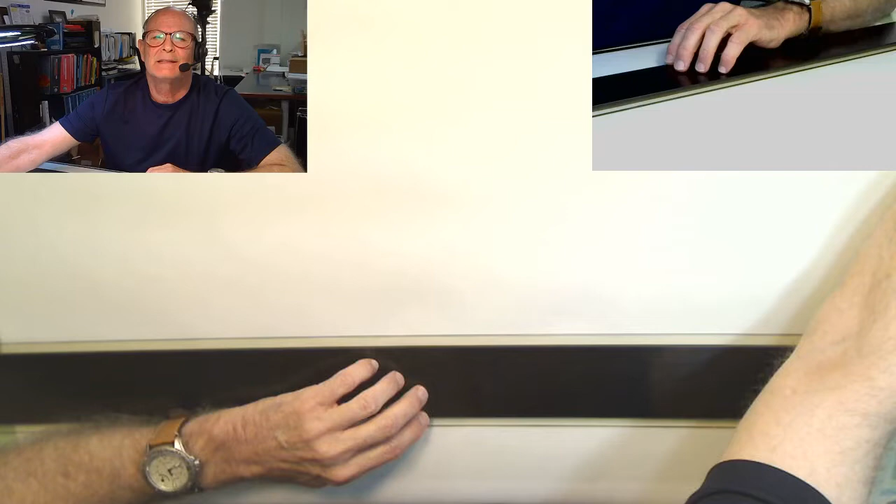Today we'll be working on reflected ceiling plans and interior elevations. So our first set of drawings in this video will include the reflected ceiling plans. So as we begin this, it would be a good idea to pull up some information that will be important for the assignment. I suggest that you print out the assignment and have it available for reference in case there's something you need clarification with or some assistance with.

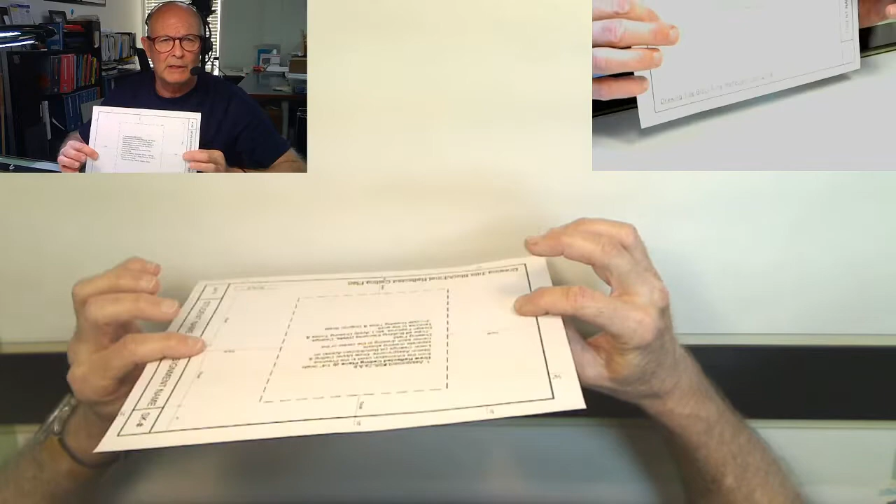Secondly, I would suggest having the assignment drawing format provided for you, so that you can look at that and understand how that works. And then lastly, it'd be good to print out a copy of the example plan so that you can refer to that as the drawing is being put together.

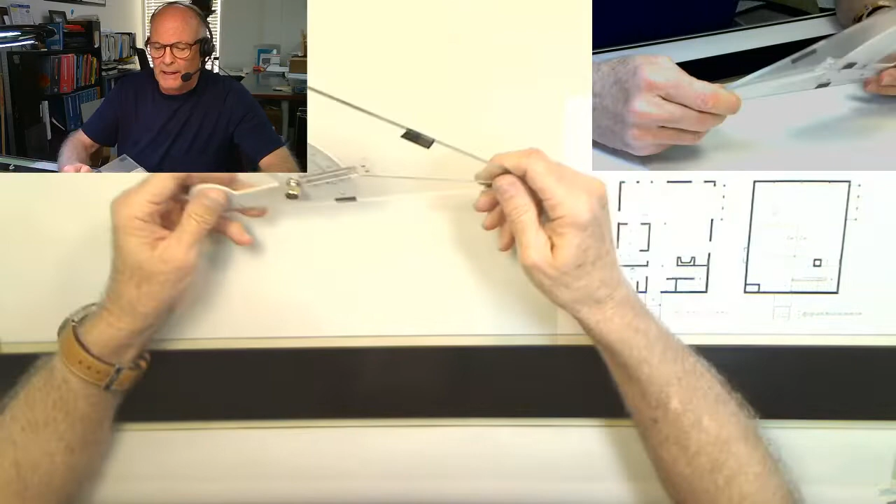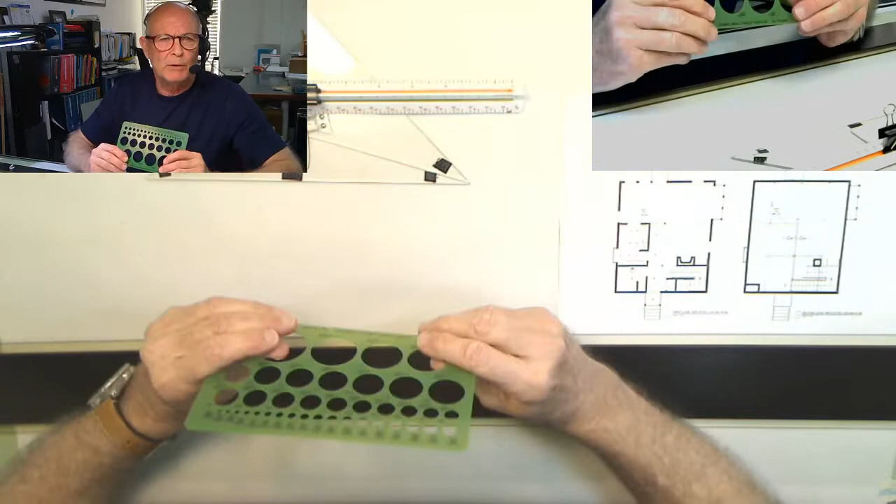So as we do this, there's a couple tools that will probably be helpful for you. I would suggest that you get a triangle that works, a 45 triangle or 30-60 is fine. A scale that includes a 1/4 inch and 1/8 inch architectural scale. Then a template, a circle template that has a variety of circles. The ones that are going to be important are ones that are listed to have an 1/8 inch diameter circle in them. So that'll be helpful later on. Some tape for holding the drawings in place, and then eraser and pencil for the assignment.

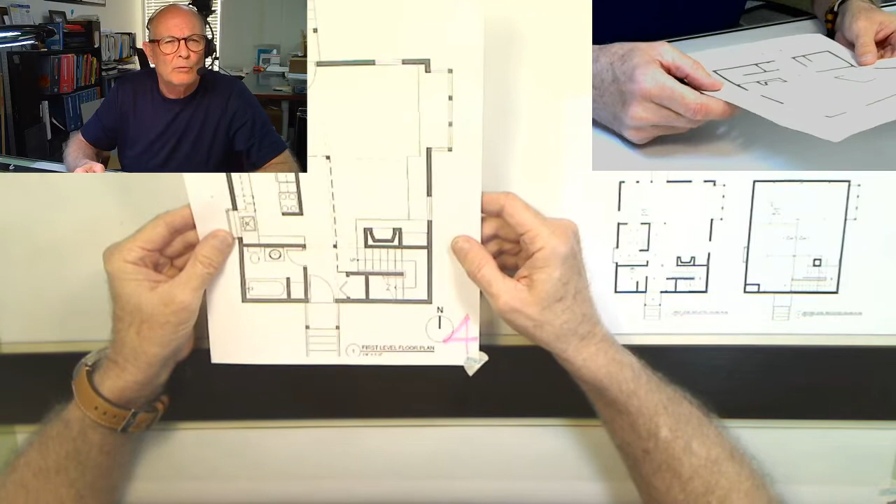So another important element in what we'll need tonight is the floor plan. So as we're working on the floor plan, it's a good idea to grab the drawing that you did previously of the lower floor. That's what we'll be taping down first, and get it set on the drawing so that we can refer to it and use the information there in the development of this next drawing.

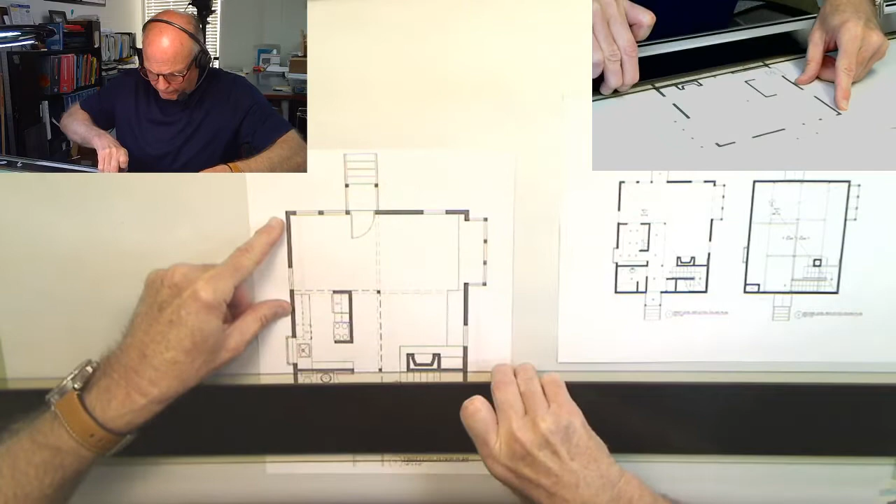So as you tape down your drawings, please make sure that your drawing is square and is oriented correctly the same way as it is on your floor plan. So all the labeling should be the same as what's going to occur in this drawing. So go ahead and square it up so that the drawing will go quickly.

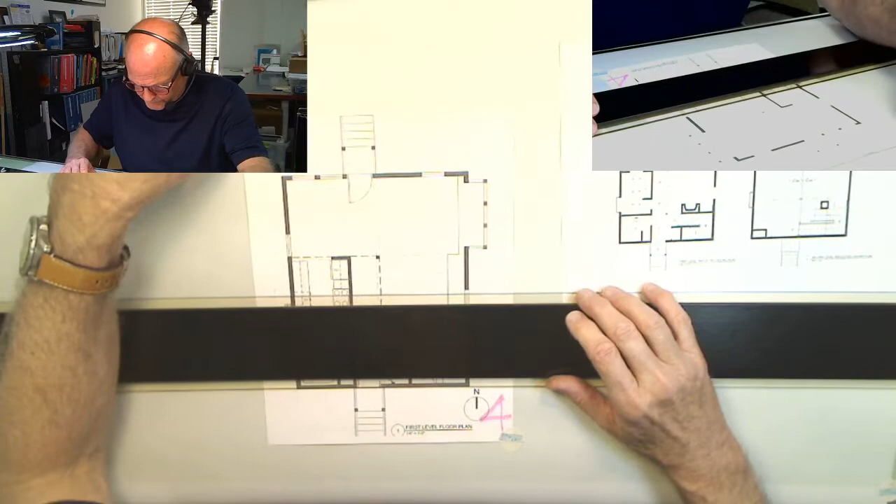Okay, so now we have the plan taped down. Let's go ahead and place a new vellum pretty much right on top of the previous drawing, making sure again that it is square and true to the parallel and T-square.

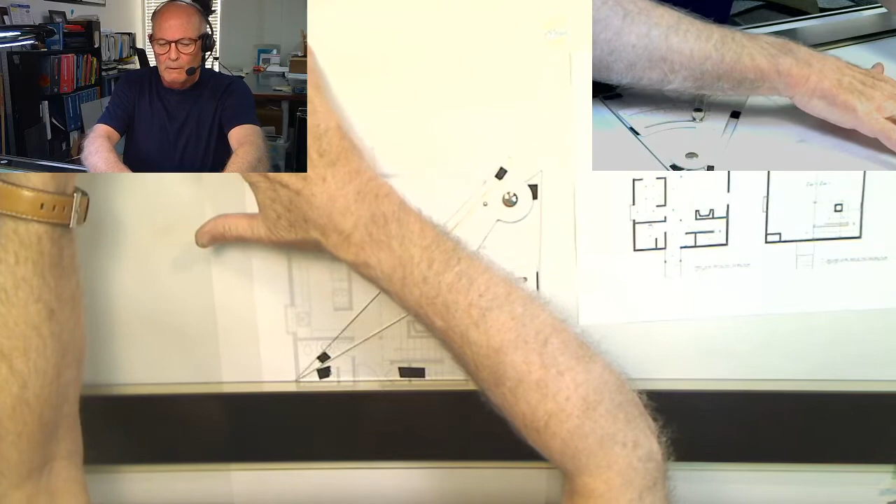Okay, now once we have it set in place and squared up, then what we'll want to do in the very first step is to simply trace the plan, and that would be the outside walls and the inside walls. And later on we'll add in the features of the plan that are important to have on this drawing. So go ahead and just trace the outside walls and the inside walls as they appear on your floor plan drawing.

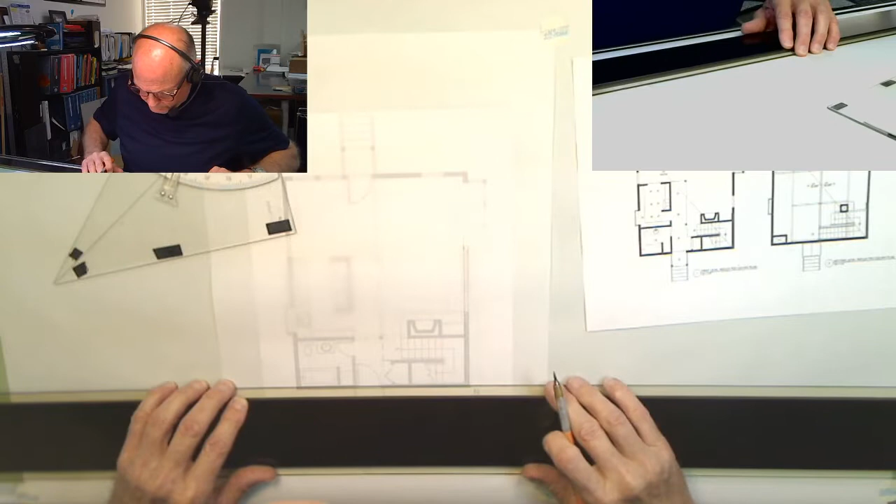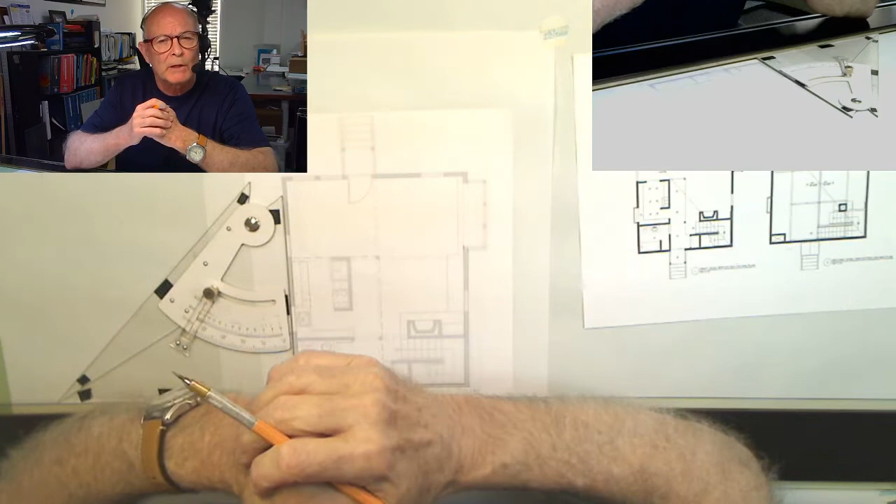Now, one of the things that you'll observe is that as I'm drawing, I will be drawing lines right over the doors and windows. And this is because as we look at the reflected ceiling plan, our plane of horizontal cut to create the plan occurs much higher in the picture plane. And what that means is that our perspective now is actually above the door opening and above the window opening. So what we'll be seeing is actually the head wall condition that occurs above each door opening and window opening. So just continue your line straight across and we'll come back through and mark them so we know the approximate location of each door and window.

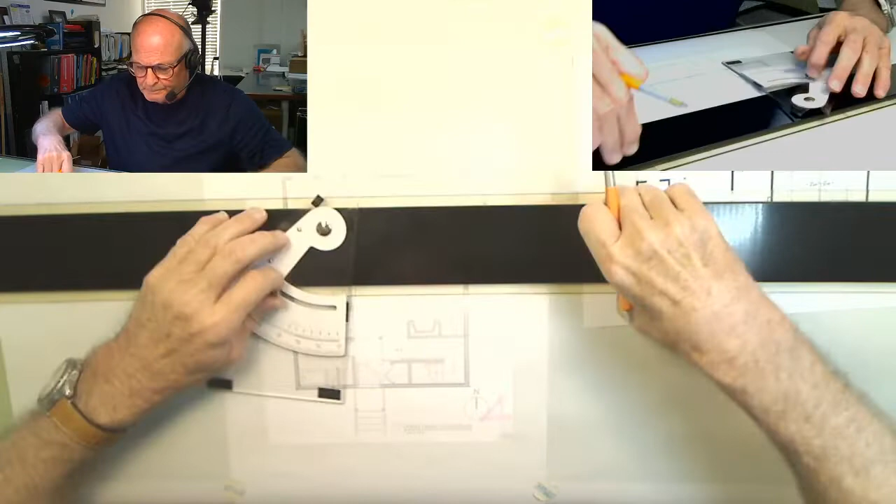Okay, so now that we have the outside walls, if you'll remember correctly, the interior walls are 4 inches, the exterior walls are 6 inches. So please try to use the same scale for all these drawings.

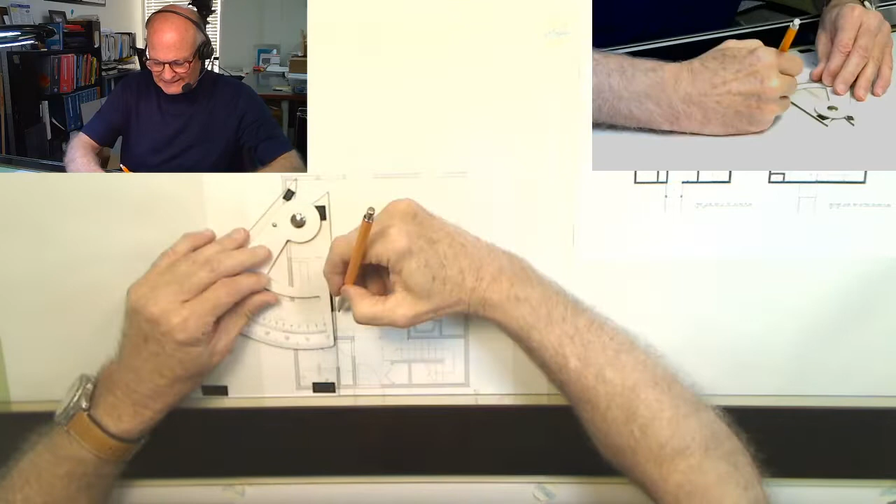Okay, so now that we have the outside walls and the doors and so on just basically drawn over those, and we have the interior walls, it's a good idea to pick up the solarium, the porch elements, and maybe the greenhouse window next.

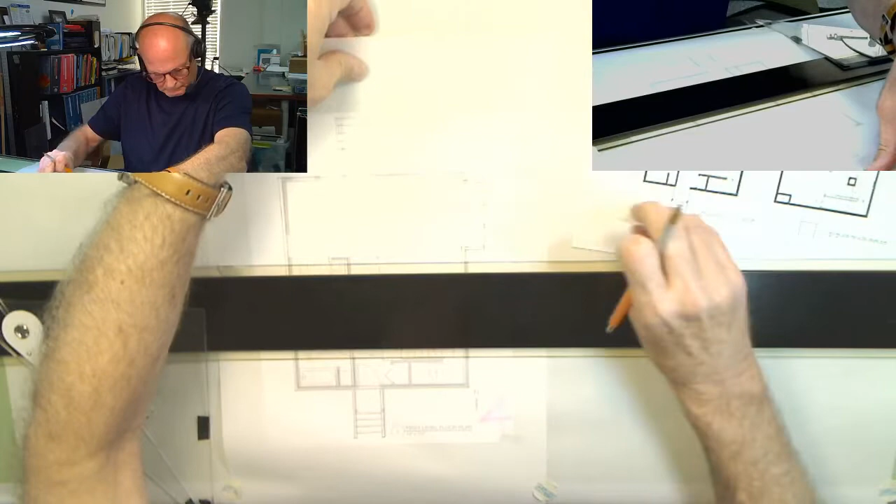Got a little tape debacle there, so we'll pick that up, get that back on. Okay.

All right, so now we have the porches, the solarium, and put in a little greenhouse window here. And so we can finish up the exterior of the building. All right, so what we have is the basic building form. There's a few things inside that are important that we need to also include in this.

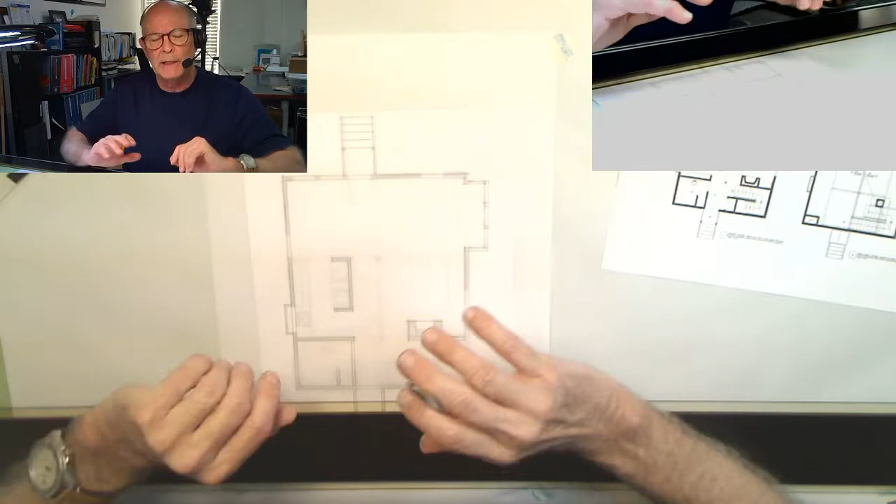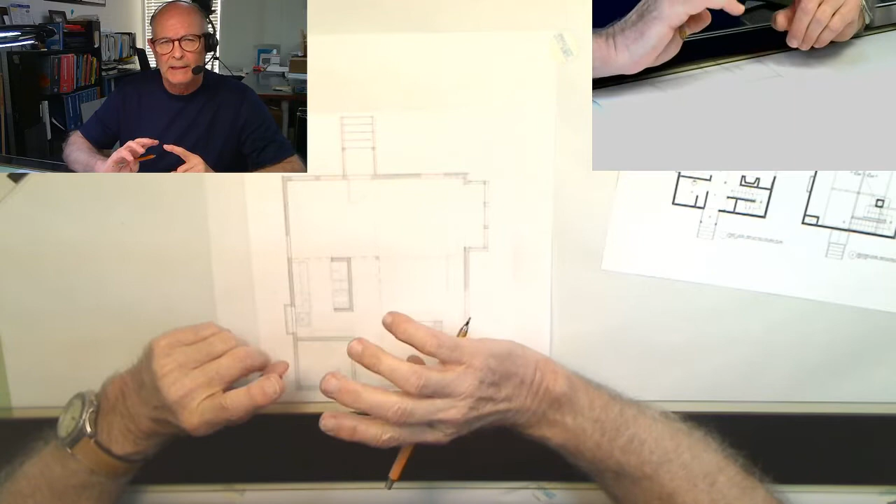And so what we want to do is pay attention to certain things that are happening and remembering that the space from the section drawing, you'll remember that some of it was open to above and some of it was all at a lower level. So that lower level, which is really the ground floor level, needs to be looked at differently for this reflected ceiling plan because that's what we're focusing our attention on.

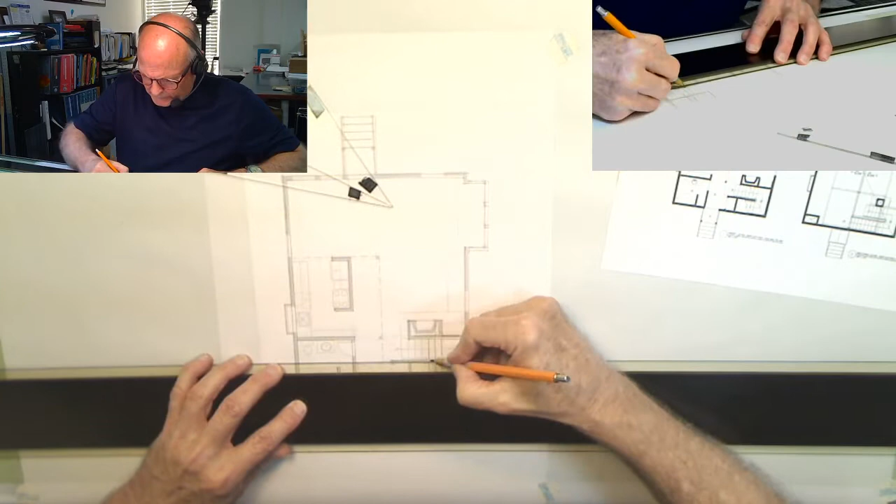So in completing this part of the drawing, let's take a look at the interior features and focus on them for a minute. So I would spend some time on the stair, on the bathroom, and the kitchen, filling in and outlining and tracing those forms that you have on the drawing already. Oh, forgot my closet here. Let's get that in there. Okay, and the stairs, we'll get those put in.

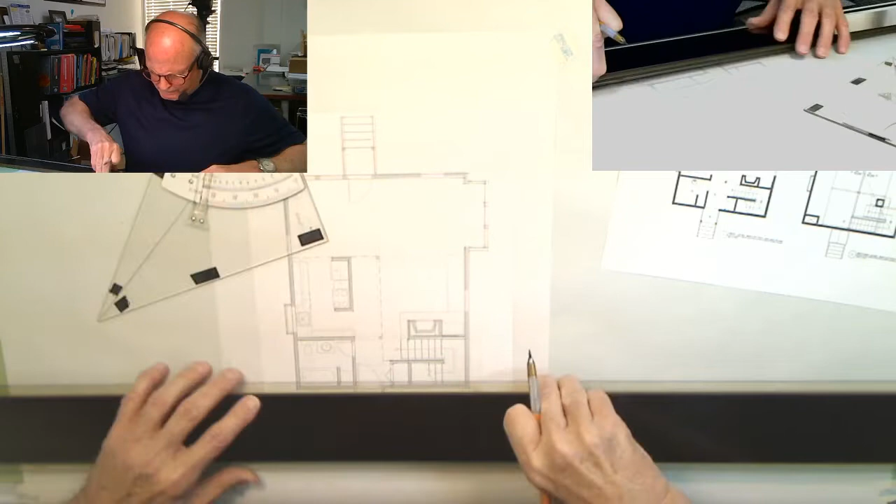Now the bathroom, we have a tub, a water closet, which you can just kind of rough into that form. You can use your templates or you can kind of come up with your own at this point. It's just a rough in, so that's probably something to keep in mind. We have a lav sink, and then we have a little cabinet. Okay, so the stairs are done. The washroom is done. Now we'll do the kitchen.

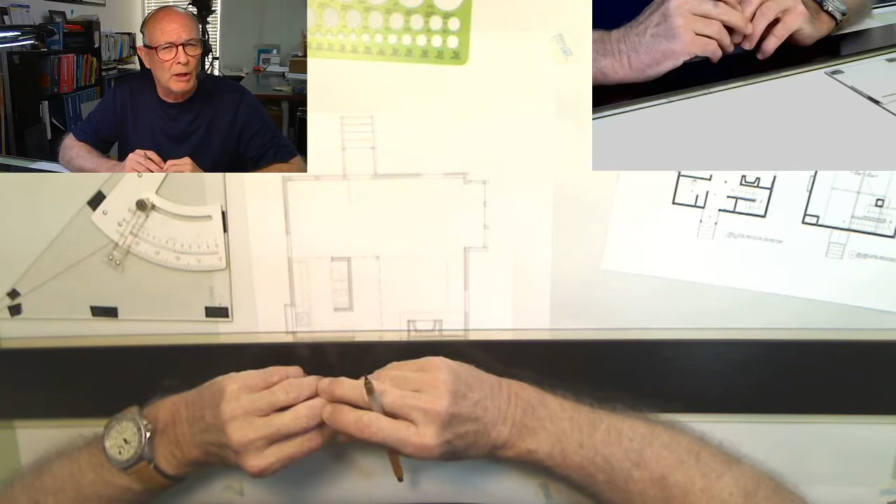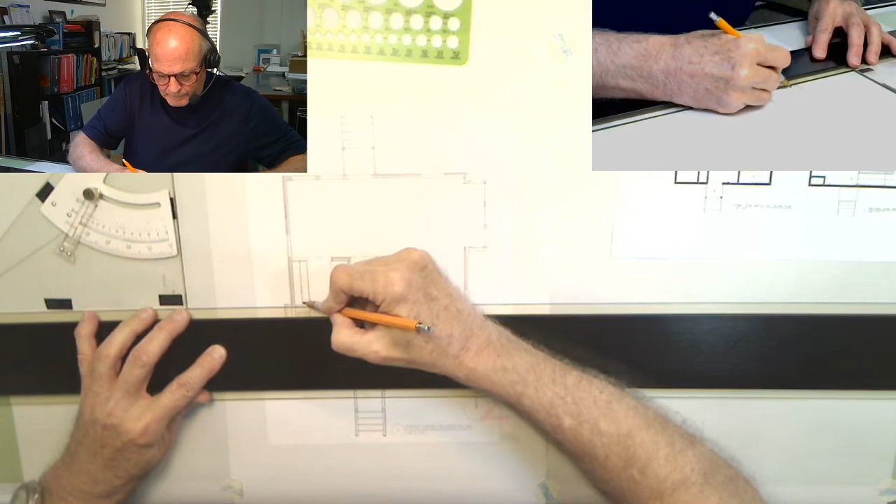So in the kitchen, we're going to put in the base cabinets. We're going to put in some plumbing fixtures, and we're going to put in appliances that will help us understand how the lighting is to be laid out. Now it's probably worth thinking about this a bit. Since our cut and our view is so much higher, we will not have dashed lines where the upper cabinets are anymore. These will all be solid lines because we'll be looking down on them from the ceiling height down.

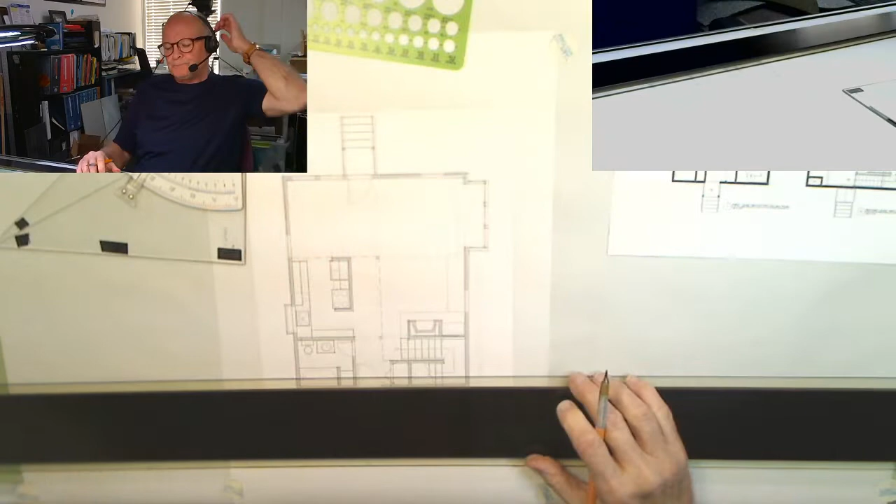Okay, so we're getting close. Now, as we look at this drawing, we're going to see that there's some important elements that haven't been thought through just yet, and it's important to think about them. And that is that the elements of the lower floor really only occur in terms of spaces at the kitchen area, at the hallway that leads to the entrance down here, and in the washroom. And of course, there's a little space here for the closet as well. But those are all at the one-story space.

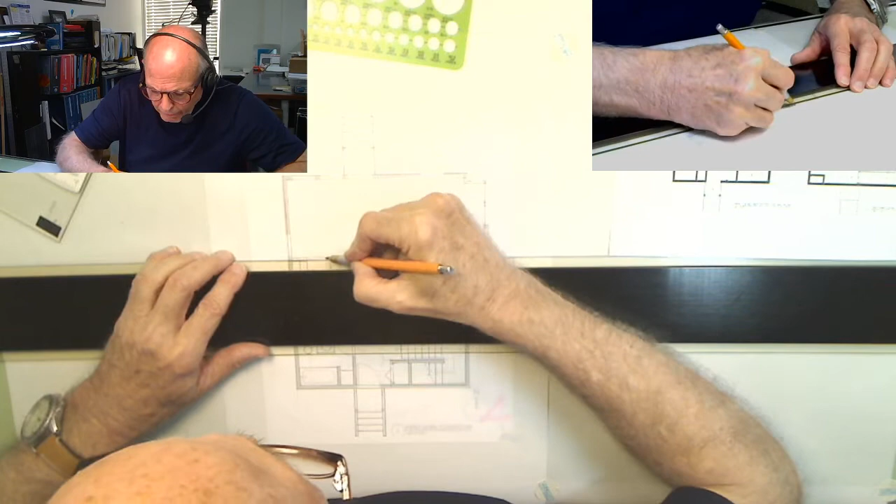The remaining portion of the plan extends up to a two-story space, and so it is open to above. So, as a result, it's important to define where those boundaries are, and that's done as an edge condition, much as you would see in a soffit or a ceiling overhang. So, I'm going to draw that in here as just a single line. And those lines line up with the posts that are supporting that second floor.

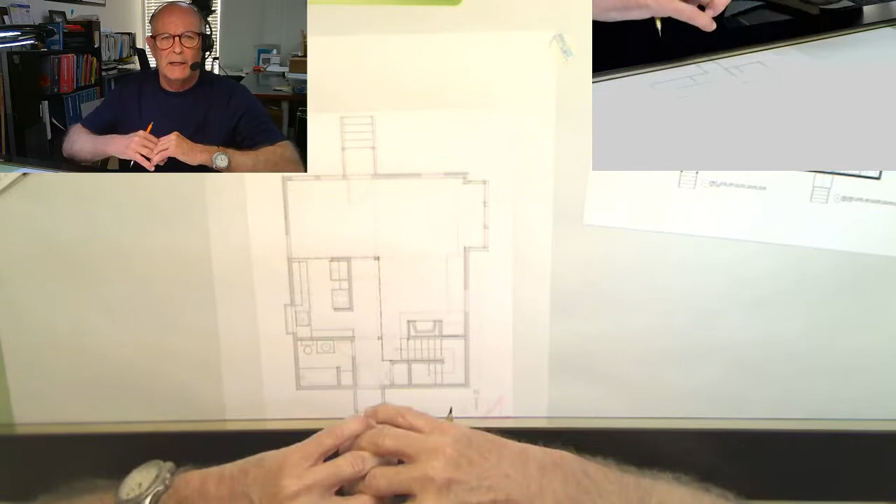Okay, so let's do a quick review of where we're at. We've drawn the outside, we've drawn the inside walls, we've applied the porch, the solarium, and the greenhouse window on the outside. That didn't take very long, and nor should it. This information is already in the design, and so what we're really doing is replicating it, so that we can look at how the ceiling is treated and what are the ceiling components that are going to go in it. Primarily the lighting, and so we'll be taking a look at the lighting in just a minute.

So we have an edge along here that is supported by the posts, and that represents the two-story space right here. So as we move from the second floor plan and start to transition to the ceiling plan, the things that we'll want to know are that there are things on the ceiling that need to be placed. And the primary element, at least in this exercise, will be the lighting. So let me say a couple things about lighting.

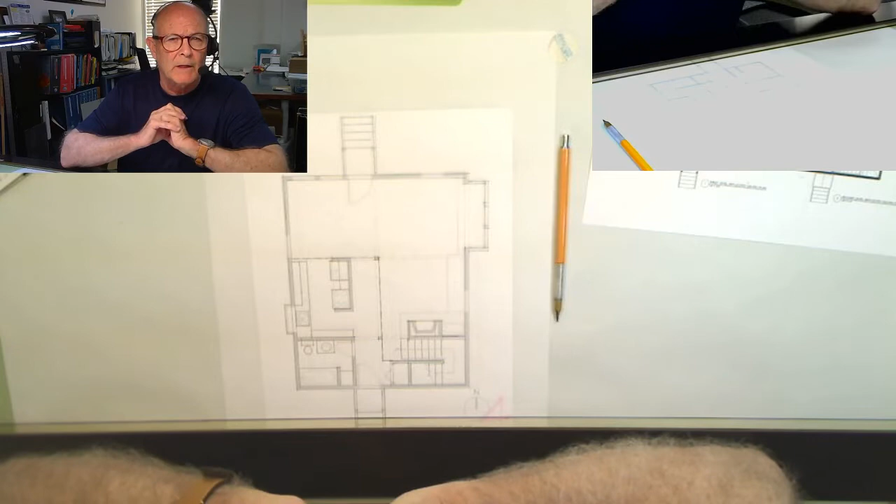We want, as a design, the lighting to be represented in a thoughtful and well placed kind of arrangement. And what that means is typically that we want things that are centered in the space or logically located in such a way as to create order and continuity in their placement as well as function. So in this plan, we're going to use our sheet that we have here, and we can see the lighting that's provided. Now, the lighting that's here is a 6-inch downlight for simplicity purposes.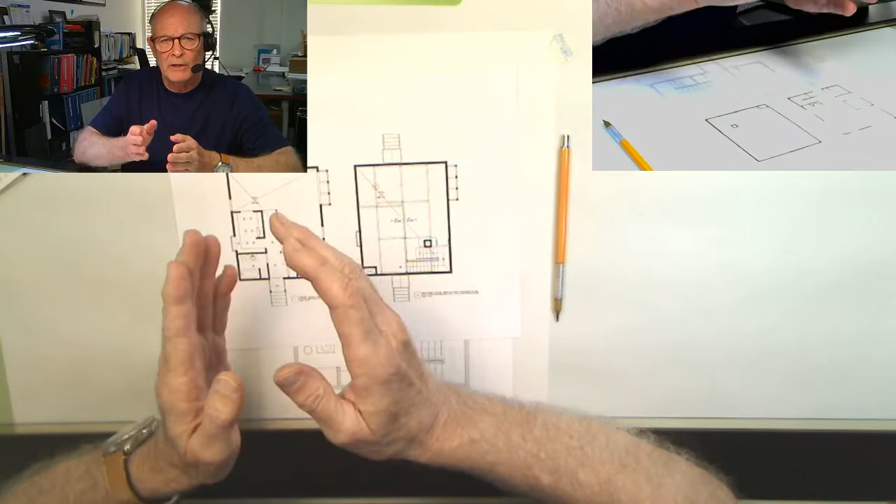And so what we're going to want to do is look at how they're placed so that we get the best benefit of, I'll say, spacing and symmetry on how they're located. So I'm going to walk through the placements on here, and then you can follow along and mark them on the plan as necessary. So first, let's start outside the building. We have lighting in the porch ceiling so that it lights the porch area and illuminates the steps as people are coming and going.

Additionally, we have similar lighting in the interior stair. At the lower level, we have lighting at the landing at the bottom of the stairs so people can see where the stair starts. We have lighting on the landing halfway up the stairs, and then on the second floor you'll see we'll have lighting above the landing there also. So those will need to be provided.

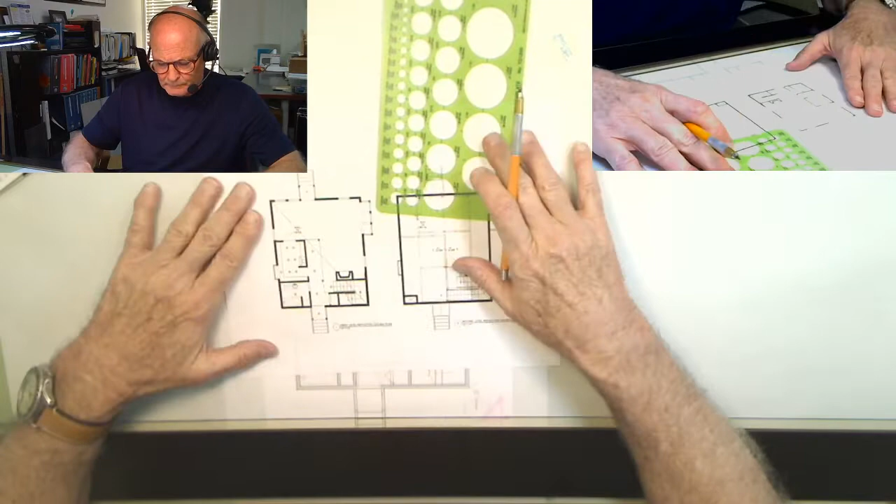Again, using a 6-inch downlight, which will be represented by an 1/8-inch circle on the plan. So those are pretty easy to place. Remember to look at the plan here and try to place them in the center. So they would be in the center of the landing, left to right, and also top to bottom. Likewise, down at the bottom, we want them centered in a way that we get good illumination of the lower landing area.

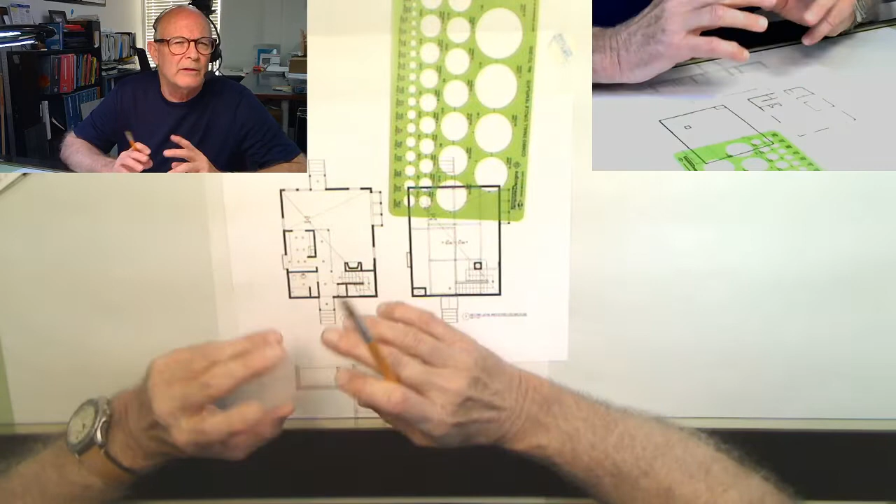The next space includes the washroom. The washroom has some very simple fixtures. There's many more fixtures that could go in these, but for this exercise, we're just keeping it simple. We have a central downlight provided for general illumination of the space. And then over the lav, we have a small lav light that is a wall mount fixture. If you look closely, I just try to replicate its shape and its form when placing that one as well.

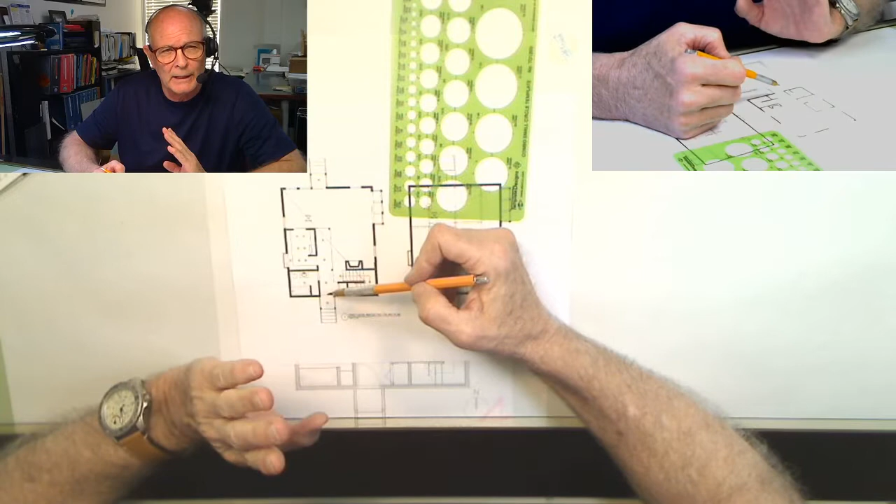So that leaves us with two spaces where we need to look at the lighting just a bit more closely. In the lighting provided for the hallway, there's a strong central axis that we're orienting our light placement on. We have 3 fixtures, and I notice that the top and the bottom fixture, as oriented on the plan, don't seem to have a super strong bearing on anything functionally or geometrically. But the center fixture has an alignment with the other fixtures in the kitchen. So we'll want to be thoughtful of that.

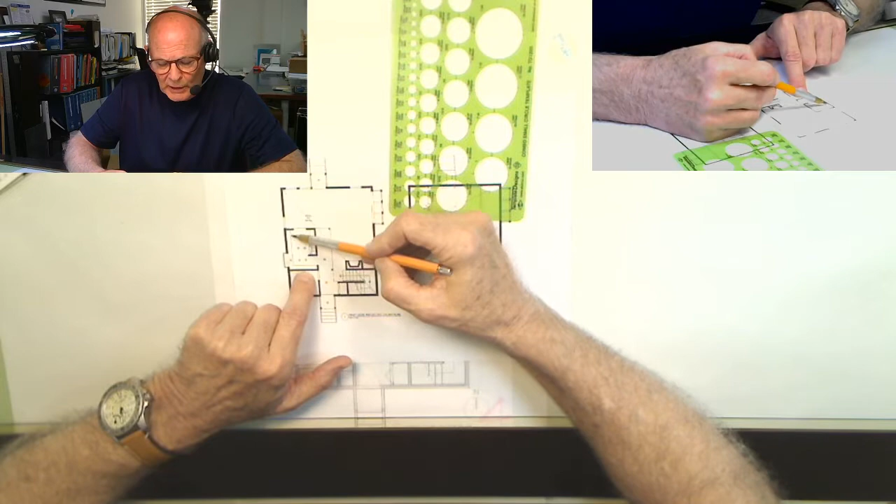Once we're in the kitchen, we have a spacing of light fixtures intended to be uniform and yet well spaced for the functions required in the kitchen. So now I'm going to walk through how I space these out in a little more detail. To find the placement of these lights down the hallway, I'm going to focus on them being centered left to right so that I get a nice ordered placement.

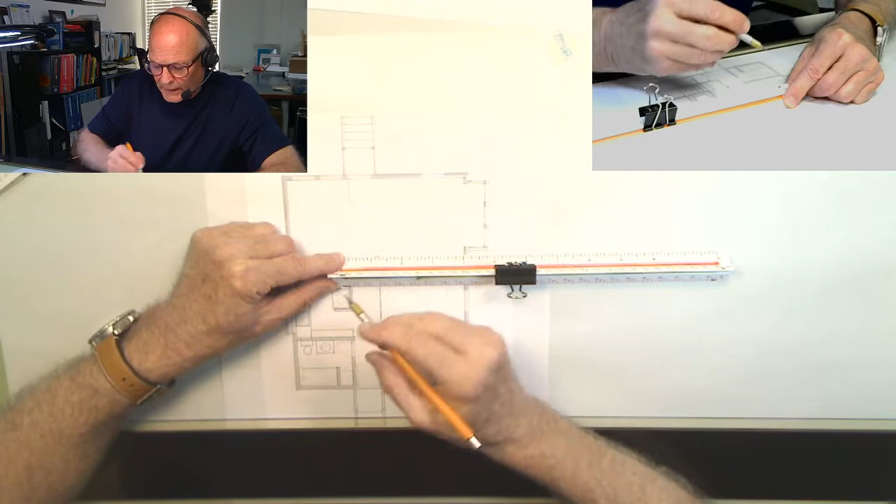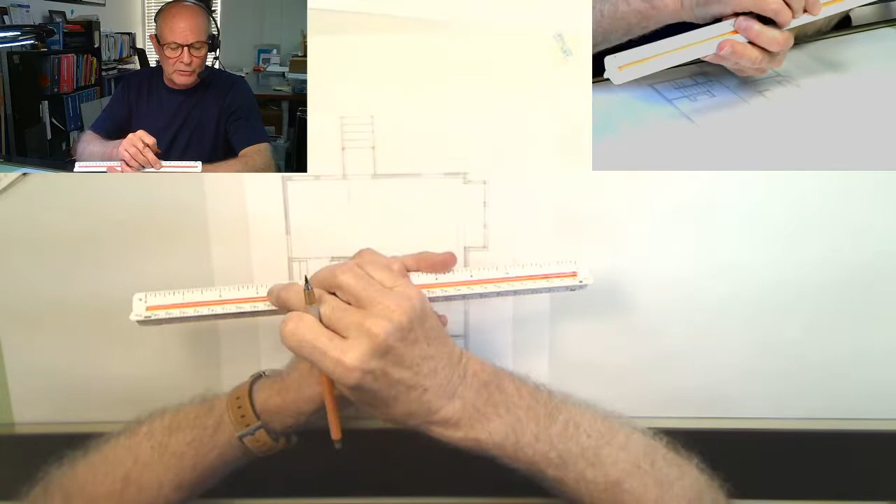As I measure the hallway, I observe that it's close to 4 foot. You might want to find the center line of that hallway by measuring and marking and then providing a simple line to indicate where that center line occurs. Mine looks like it's actually closer to 3'6", which would be 42. That'd be 21 inches, which would be 1'9". So I'm marking 1'9" on my plan and drawing a vertical line down the center, so I'm equal on this side and equal on this side.

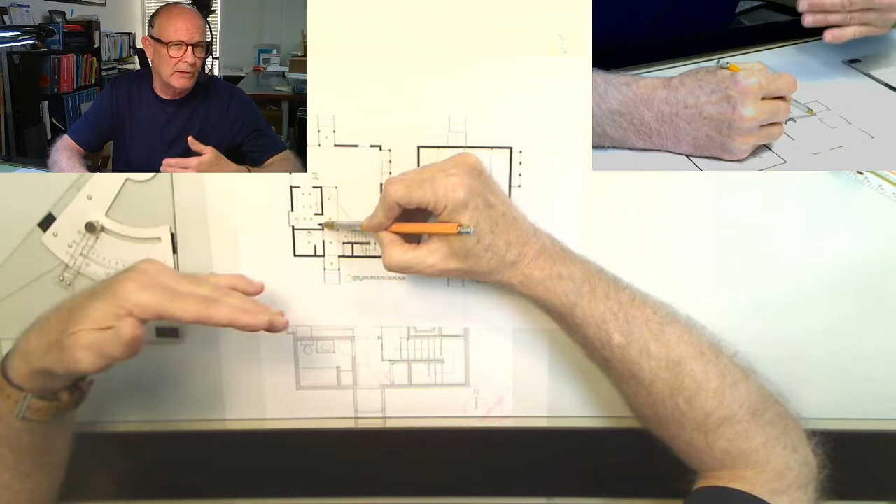It's pretty straightforward. Now, as I mentioned, we want the alignment of the fixtures to make sense, running from the hallway into the kitchen. So that alignment becomes important. I'm going to find the center line between the wall and the face of the cabinet, because the cabinet extends all the way to the ceiling and becomes the limiting factor, the boundary of that ceiling.

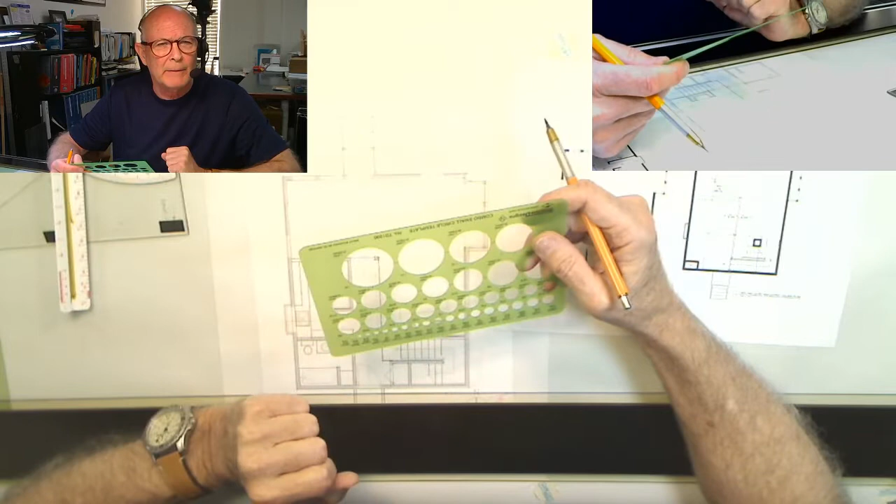For this demonstration, my measurements appear to be very close to 30 inches, and halfway would be 15 inches, or 1'3". So I'm marking my drawing at 1'3" and extending a line there. Now, if you want, you can draw your circle template where that intersection, or first light fixture, is occurring. I'm going to go ahead and do that so I know where it is, and there it is.

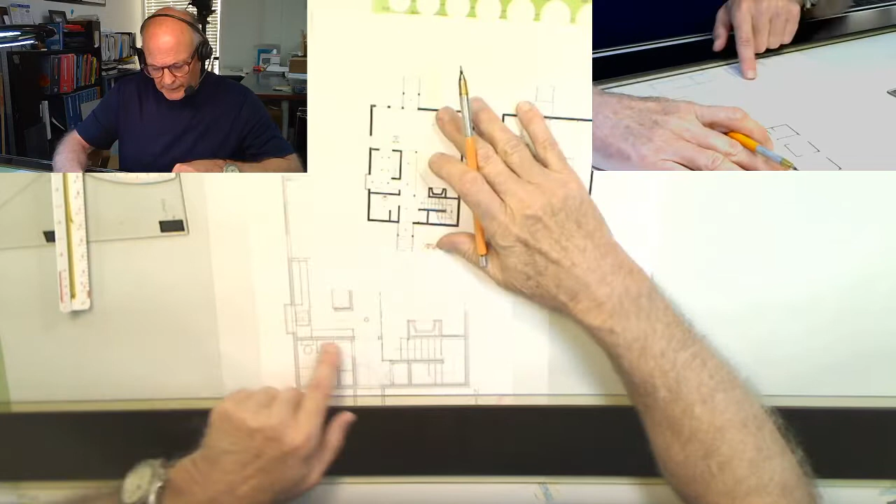That's a 6-inch fixture, and I've located it in the center of this axis and this axis. So now, looking at the other plan, I see I have several other lights that line up, and I've already got them figured out in terms of their axes, but not their exact placement. Now, probably from a functional standpoint, we're going to want to locate the light fixture close to the center of the sink so that the work that is done there can be well illuminated.

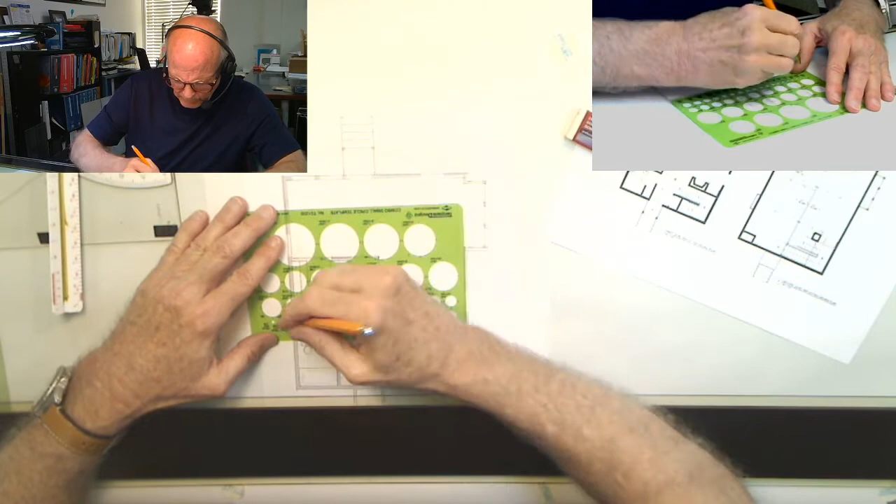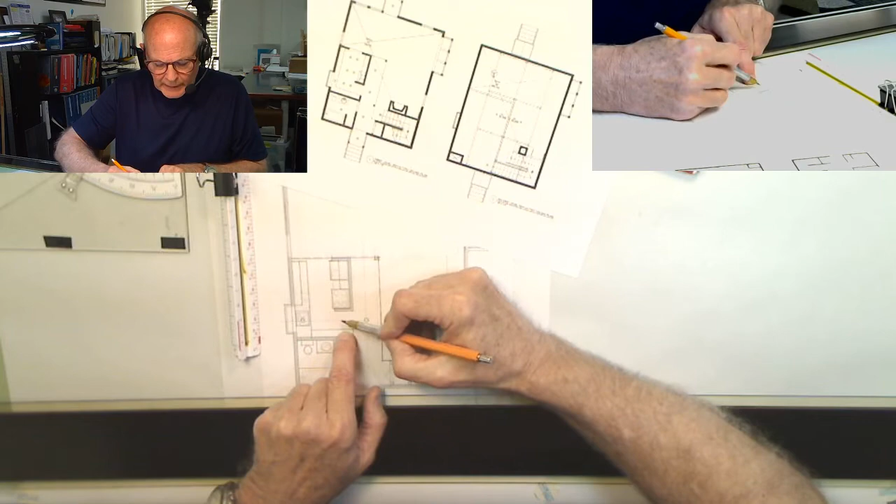I'm going to scoot that over a little bit. There we go. Okay, that's better. All right, so now we have to find the spacing of these guys. So one of the things that we want to pay attention to is the fact that we have some information based on this point right here to the cabinet. And we decided that that was going to be 15 inches. So based on this being 30, and then half of that is 15 inches. So I'm going to write 15 right there.

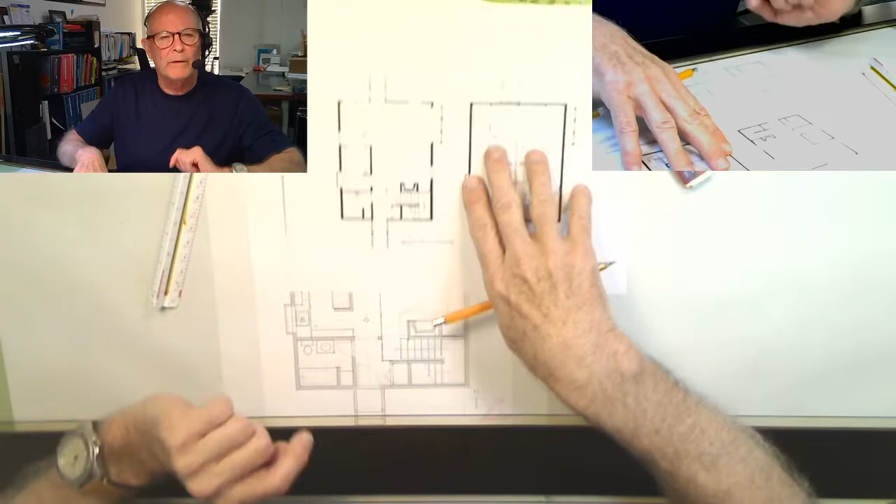Now, in order for this to be symmetric, that means that the top fixtures are going to have to be close to 15 inches away also, so that they are bookended in the same dimension. So I'm going to measure from the edge of the overhang soffit 1'3", and I'm going to mark a horizontal line across there. So now I have this placement of two lights and this placement of two lights, at least from top to bottom. So we know where they are. Now all we really have to do is find that center row and then space them left to right.

So let's find that next dimension. Simply measure the dimension between the two, and as I'm looking at this, it appears that I have 7 feet, close to it. You may be a little off, but it should be close to that. Okay, so based on that, half the distance of 7 foot is 3'6", so I'm going to measure 1, 2, 3, 6 and that's going to give me the approximate center of these two. So now this spacing and this spacing are the same, and all we have to do is find where the two rows are left to right. So let's talk about that for a minute.

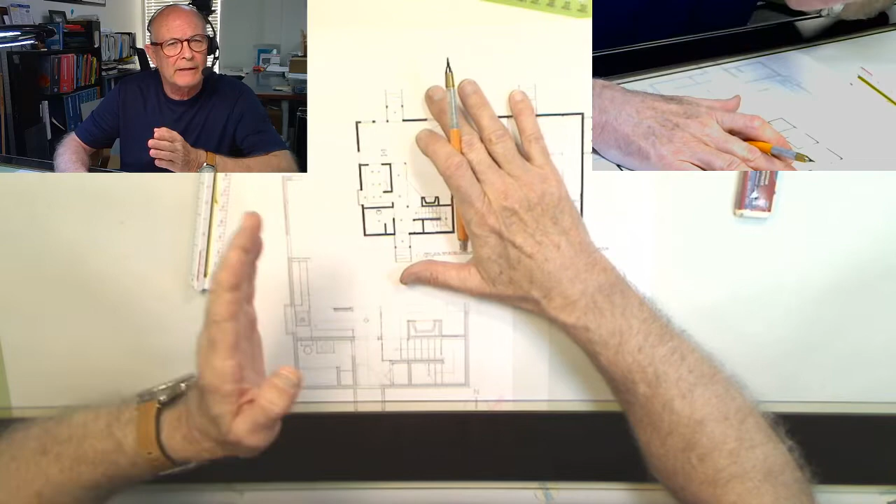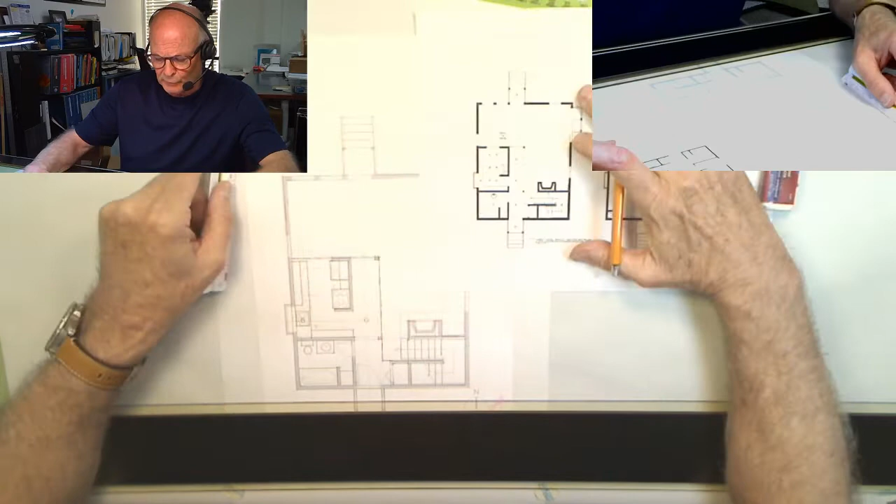In order to find that information, what we want to do is, again, find uniformity in spacing. And that occurs by looking at the boundaries and dividing them up by the number of fixture spaces there are. So looking at this plan, what we'll observe is that we have an edge that occurs at the upper cabinet on the left side, and the same thing occurring on the right side. So as we look across at our drawing, at the ceiling from left to right, what we'll observe is a total distance of about 5 feet. Could be a little more, could be a little less, but close to it.

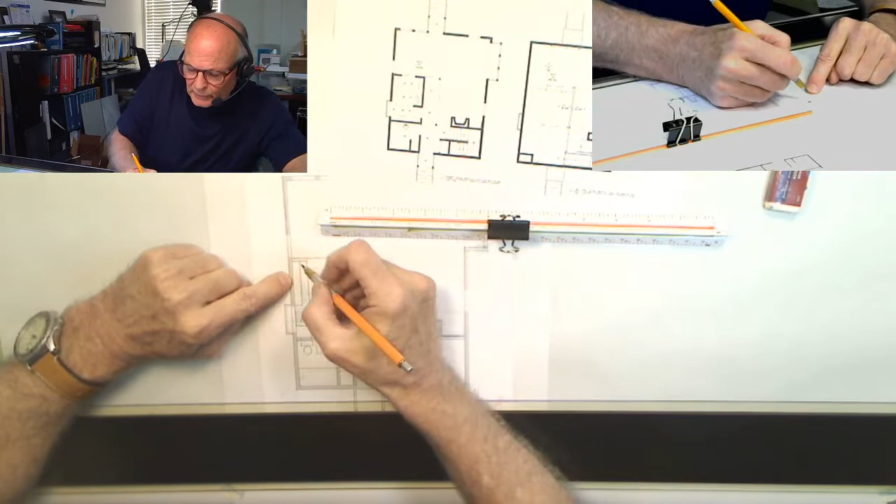So dividing 5 feet by 3, because I have 3 spaces, a space here, a space here, and a space here, I think I'm going to convert to inches. 5 foot is 60 inches. 60 inches divided by 3 is 20 inches each. So I'm going to mark across here. I'm going to measure from the cabinet, not from the low cabinet, from the upper cabinet, 20 inches, which is 1 foot 8 inches. So I go 1 foot and 8 inches, and that's part 1. And so there's my mark, and I'm just going to put 20 inches so I remember.

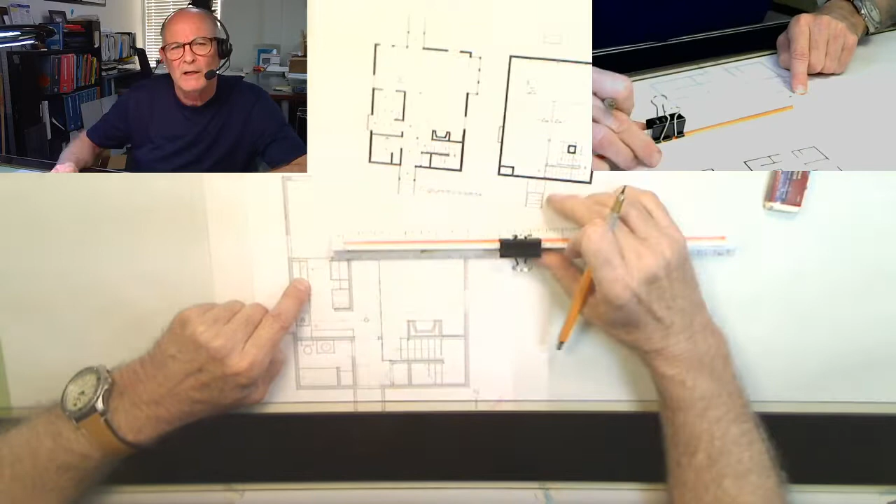I'm going to do the same thing on the other side. So I mark 1 foot, 8 inches, and then put 20 inches there. And now I just draw 2 light vertical lines. And we have 1, 2, and that one's a little off. I'm going to fix that up. Shadows on my drafting tools are causing a little bit of a problem. Okay, so here's 1, here's 2, here's 3, here's 4, here's 5, here's 6.

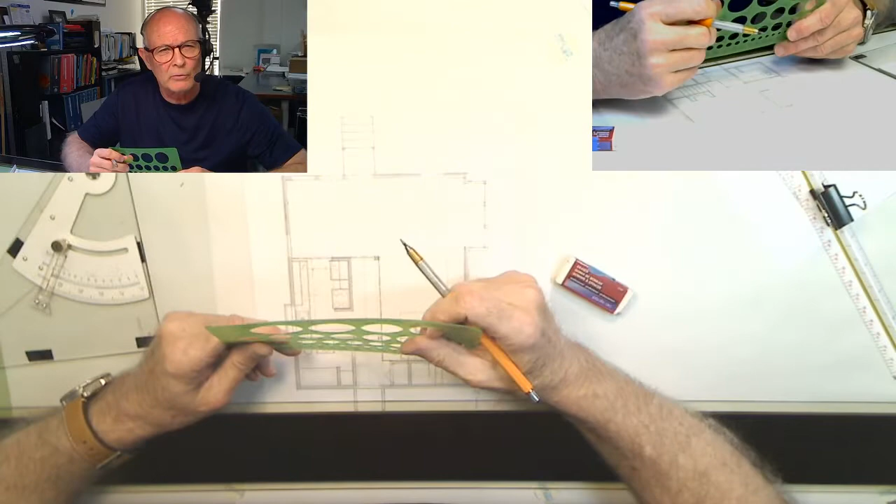Using the circle template, I'm going to go ahead and place those light fixtures at the intersections of those lines. So here we go. Oh, wrong line. I'm going a little too fast there. Let's try that again. Here we go.

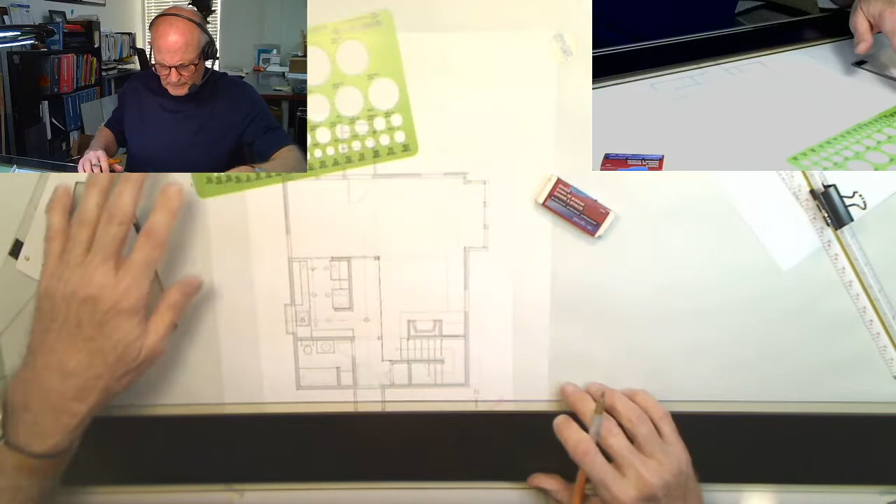Okay, it's not perfect, but we can fix them up a little later during the final exercise. So what we have now is our lights 1, 2, 3, 4, 5, 6, 1, 2, 3, 4, 5, 6, aligned with the sink fixture and aligned with the hallway fixture. Okay, so that roughs out the placement of the lighting.

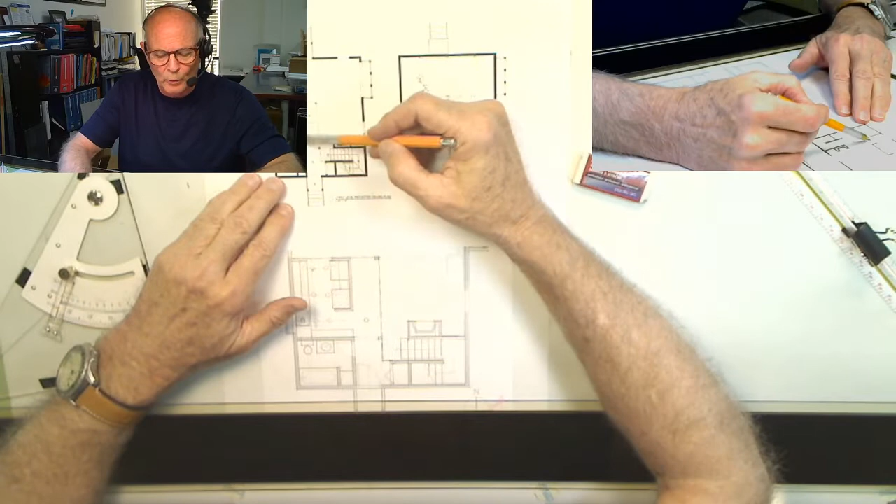Now, if you look also within that kitchen, you'll observe kind of an interesting form right here. That's a hood. So you have some latitude on how you want to show that, but you can take a look maybe at the hood in your own kitchen to see how far it extends out, and I'll leave you to draw that in as you see fit.

Now, the last 2 places we need to do is find the lighting at these 2 ends. We found the center, and now we just need to make sure that this space and this space are uniform. So in doing that, there's a couple approaches. I'm going to give you a little bit of latitude here.

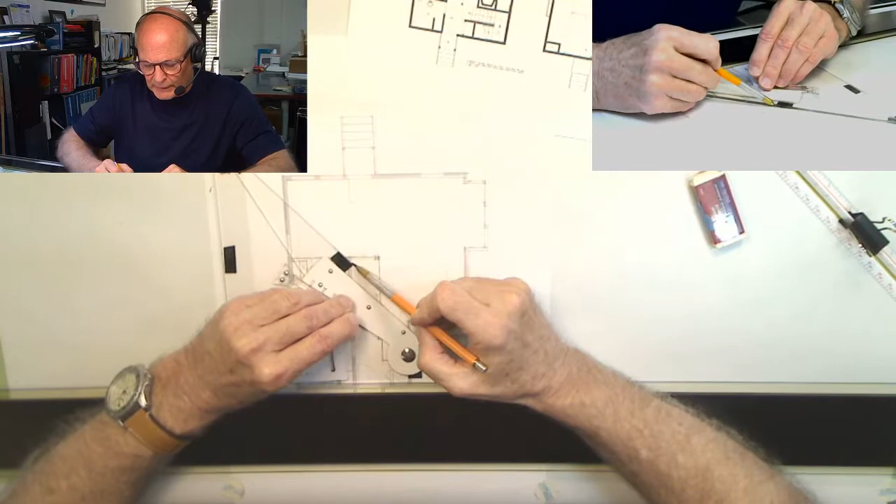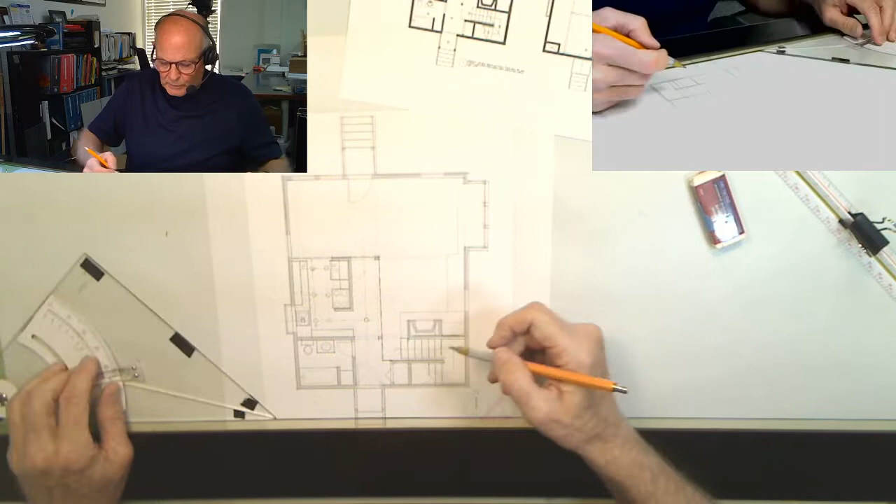One way to do it is to simply make them proportional to the space. By doing a crisscross method, I find that they intersect about right there. And you could do the same thing down here. By doing the crisscross method, that puts that light fixture about there, which is close to the entry door, and that's kind of a nice thing. So I'm going to go ahead and put those light fixtures in as well.

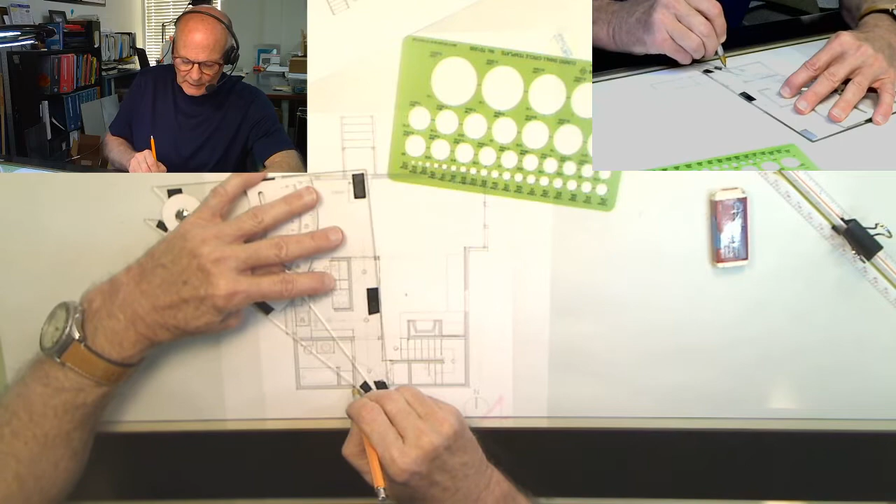Okay, so I have light fixtures in the stairs, light fixtures in the hall, light fixtures in the kitchen, and they're all pretty close to that which was provided in the design plan. We could probably throw in a quick light fixture in the washroom, and that's easy. We just do the crisscross method to find the center of the ceiling and put our fixture in there.

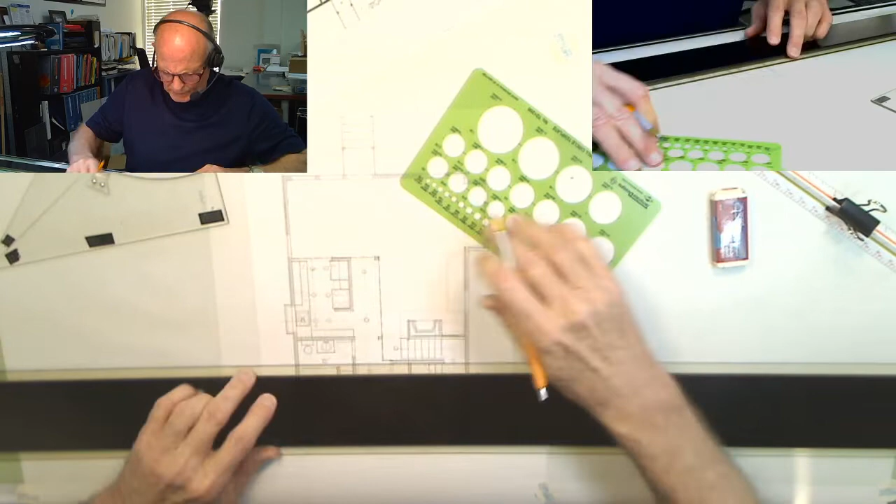I'm going to go ahead and line up the vanity fixture. There we go. Put this up, and there we go. And then crisscross over the porch for the light fixture there. Okay. And that pretty much wraps up the rough out.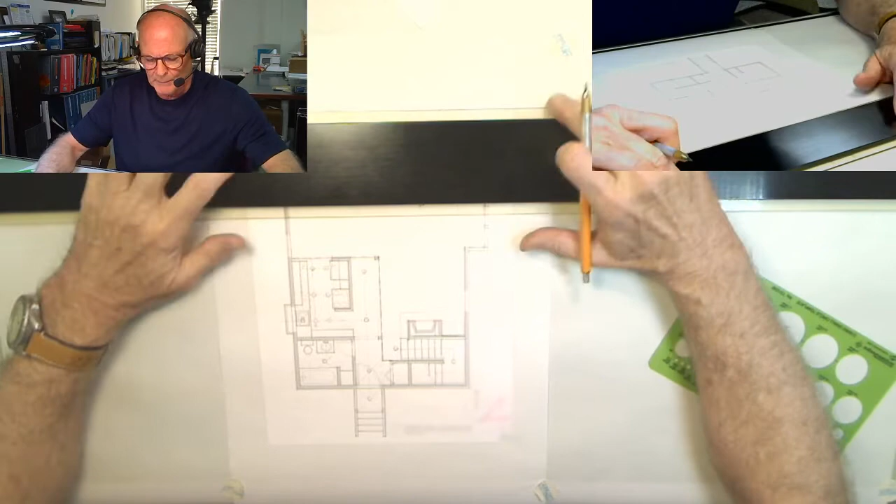One of the last things I want to suggest we do is take a look at where the windows and doors occur. We don't necessarily have to show them in detail, but it's good to show their location in case there's a ceiling fixture or some other application of ceiling design that has some relevance to the window placement. Case in point, drapery pockets, additional lighting in and around those areas are all important to show. So it's nice to know where those doors and windows really are.

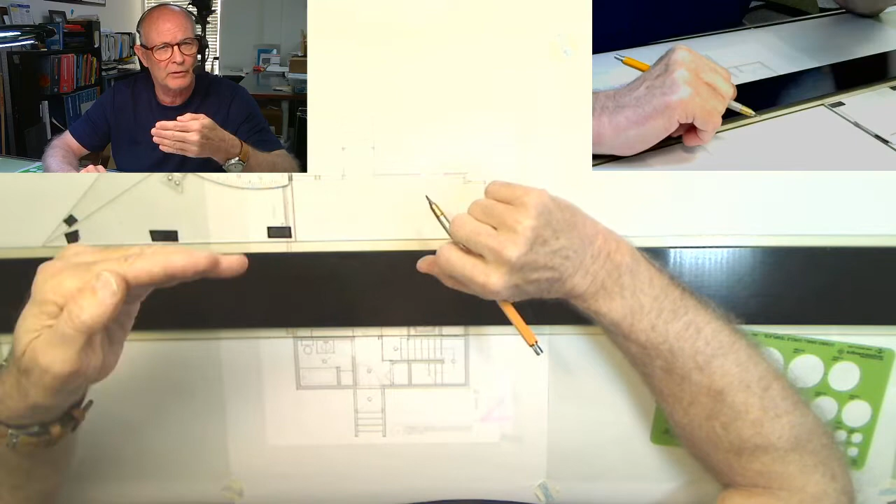That just requires a simple mark at the edge of every window without showing the glazing. There's no three lines, it's just the outside line and inside line. Same thing at the door. We're not going to show the door swing. We're not going to show the door. We're just going to show where the door opening occurs. This permits us a way of keeping track of those features and where they're located.

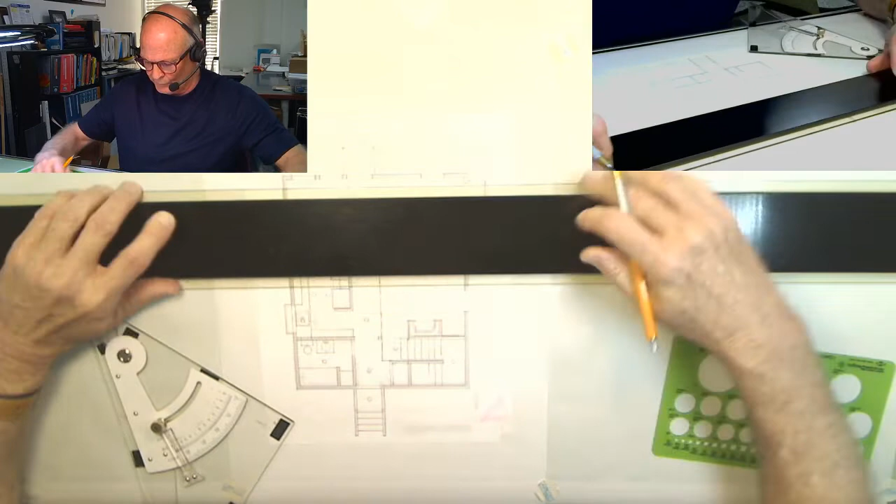Okay, so we've done the majority of the plan. We have a couple more things to do. If you look at the plan, you'll observe that we've articulated where the low ceiling is, but we have to define what's going on beyond that. And that is a way of simply saying we want to tell people that the ceiling is above this drawing level, and so it is open to above. And that's simply done by drawing a diagonal line through the spaces that are affected.

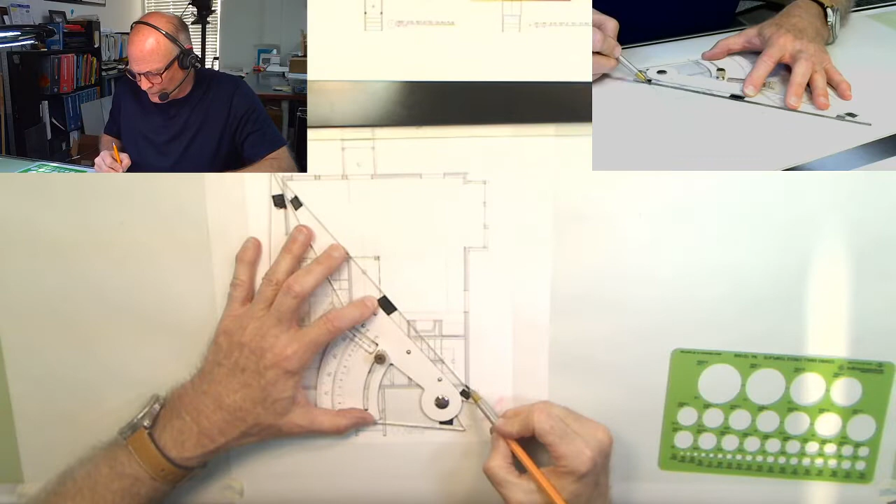And you can break them. I didn't do it exactly here, but you can break that line here, and the continuity of the information will still be good. So bring a line here to there, from this corner to this corner. And that's where we would label open to above.

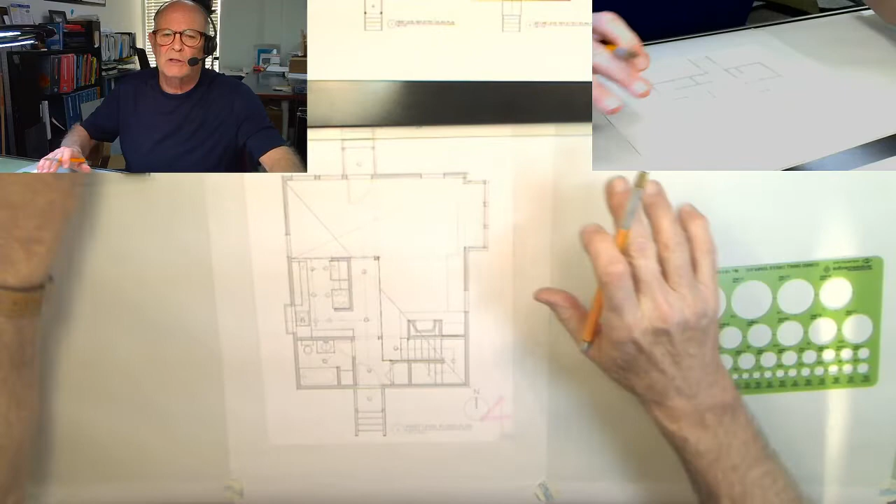Okay. Other things that we will want to do, especially as we get closer to completing the final drawing, is adding the same poche to the drawing so that we get the solid walls to punch and have a strong, prominent representation. And then we'll want to provide a north arrow, labels, and the title block, similar to what we did on the floor plan drawing itself.

So with that, I'm going to say we're done with the lower level reflected ceiling plan, and I'm going to stop the video now, and we'll start in just a minute on the second floor, which will go rather quickly.